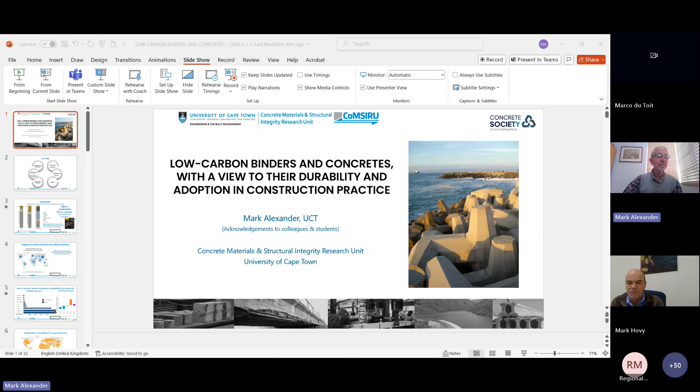All right, good. Well, welcome everybody to this CONCRETEfiX program webinar. The topic is up there: low carbon binders and concretes with a view to their durability and adoption in construction practice. Quite a big title, but anyway.

I do acknowledge my colleagues and students, most of whom really do the work, so it's good to acknowledge them - mostly members of the Concrete Materials and Structural Integrity Research Unit at UCT.

First of all, I just wanted to congratulate the Concrete Society on the Fulton Awards dinner of about a month ago. I came to that event, and I was absolutely delighted to see a crowd of close on 270 people.

And what particularly delighted me was that I knew so few of them. Why do I say that? Well, it just means that there's a whole lot of new faces, renewed interest, and that was very encouraging to see. And if you're not a member of the Concrete Society, I'd really strongly encourage you to sign up and become a member and make the society as great as it needs to be.

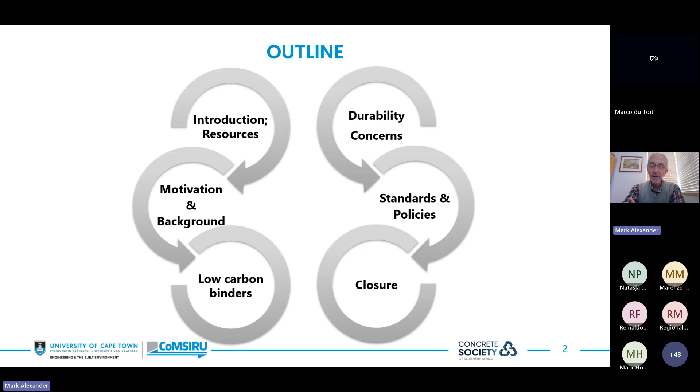So let's get started. Let me see if I can get started. There we go. Okay, so this is what I want to cover: an introduction, resources, some motivation and background, low carbon binders - what are they, what do they mean - durability concerns that may relate to these newer binders, and then some standards and policies that need to move us to the point where they can be adopted in construction practice, and then we'll bring it to an end.

I think that's an important point, that although we use this material in such huge quantities, its overall contribution, while very significant and needs to be brought down, is less than you might expect. That's contrary to what many opinions are out there in the popular press, or the uneducated press, if I may put it that way.

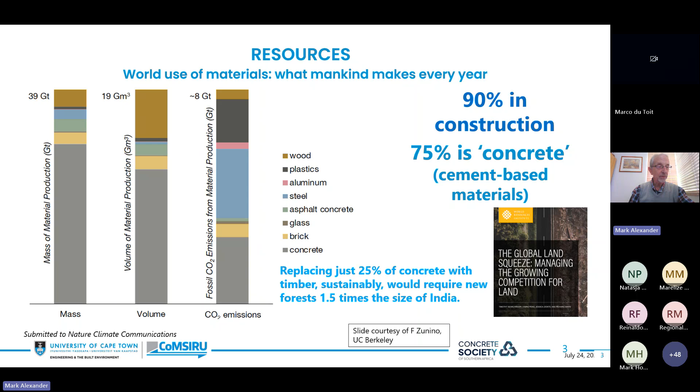If we were to replace just 25% of concrete with timber sustainably, this would require new forests about 1.5 times the size of India. So people are talking about timber as an alternative material. It has a niche, of course, but it's not going to replace concrete in the foreseeable future.

So this question of construction and building new facilities is a huge issue, a great challenge, and how we're going to do that while at the same time starting to minimize our carbon footprint. Those are the real challenges that are going to face us moving into the future. That's a very interesting slide.

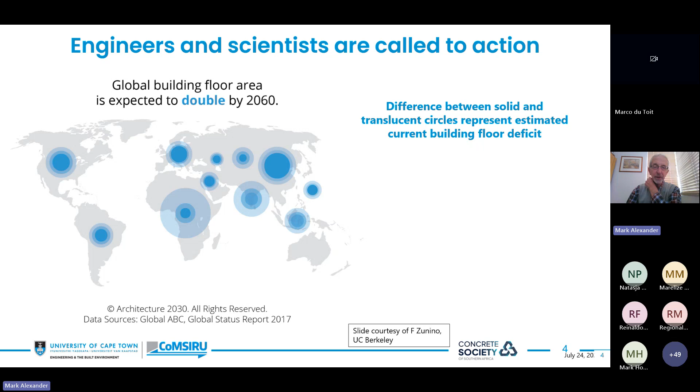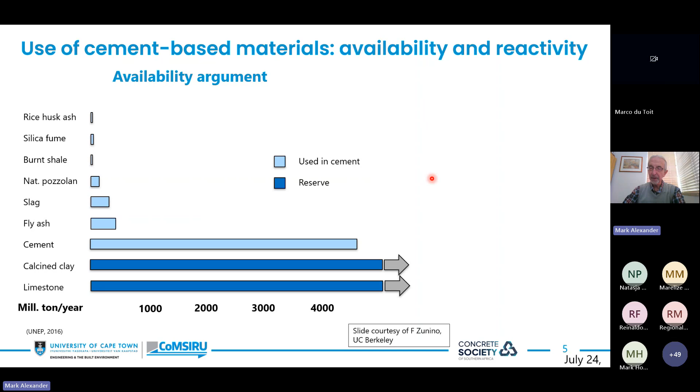But with the clays and the limestones, the calcined clays and limestones, in effect we've got, I wouldn't say unlimited, of course, but substantial resources of these materials available to us in construction. And this is where we probably need to be focusing our attention.

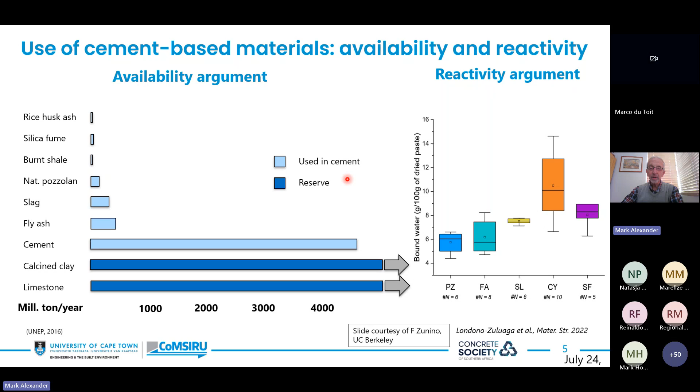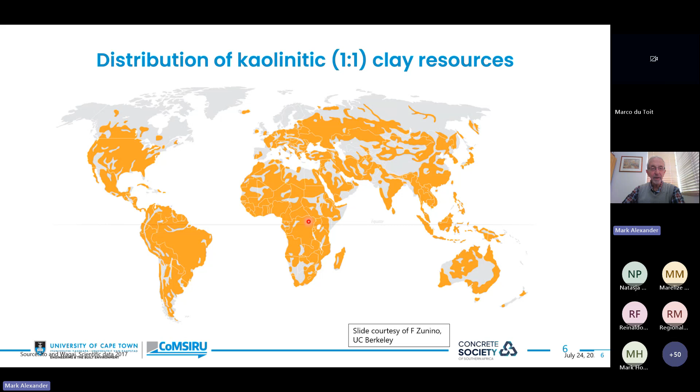More particularly with our own continent, they're well distributed in East Africa and Central Africa, less so in South Africa, but for us in the Western Cape there are good sources down here, and other parts of the country also have good sources. These represent the desert areas, the Kalahari and the dry Karoo. So we've got lots of clay. There's plenty of that all over the world, South America, to a lesser extent in India, but there are abundant clay resources pretty much everywhere we need them, particularly in Africa.

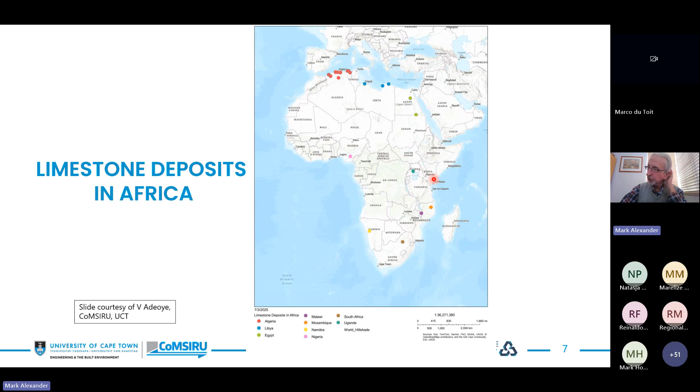Now let's get back to the topic in hand, which is this question of low carbon binders. I've got some definitions here. First of all, the durability definition is an important one. Durability is the ability of a structure or component to withstand the design environment over the design life without undue loss of serviceability or a need for major repair.

Now that's important because durability is not an intrinsic material property. You cannot talk about durability of concrete without talking about its environment and the life for which you want it to operate. So what might be durable in one environment may not be durable in another, and one must not confuse that. So durability relates to the concept of material performance. It's not a purely intrinsic property, and it relates to the dominant deterioration mechanism.

On the other hand, if we look at how low carbon binders are defined, I've made up this definition, I think it's not bad. Binders with significantly lower carbon footprint than traditional PC or Portland cement, achieved via use of supplementary cementitious materials, including calcined clay materials and other alternative binders, and possibly alkali activated materials, which may have a niche, but quite a limited one. And the caveat here is that any material we are contemplating as a low carbon binder must have a total lower carbon footprint in the finished product. It's no good doing that on a limited basis. One has to look at the whole picture before making up your mind.

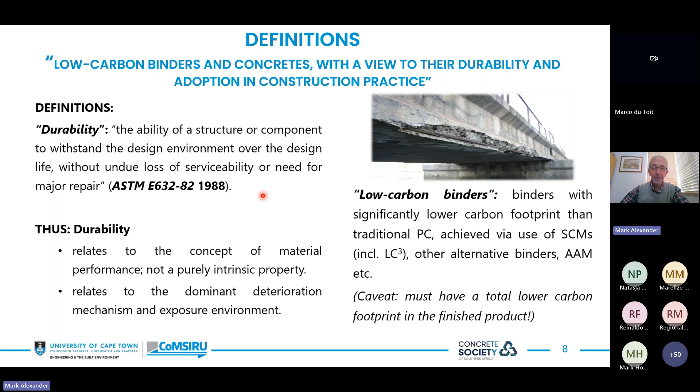That's very important. Now, we're also talking here about the low carbon economy and circular construction. Up till now we're used to this sort of loop where we get raw material extraction. It's really a linear diagram, but shown this way for the sake of space. We then go and make our construction materials, construct infrastructure, buildings, and so on. We use them, then deconstruct or demolish, which goes into construction and demolition waste, and normally to landfill.

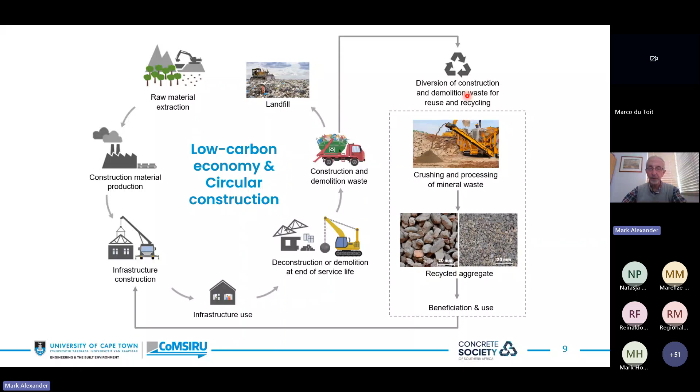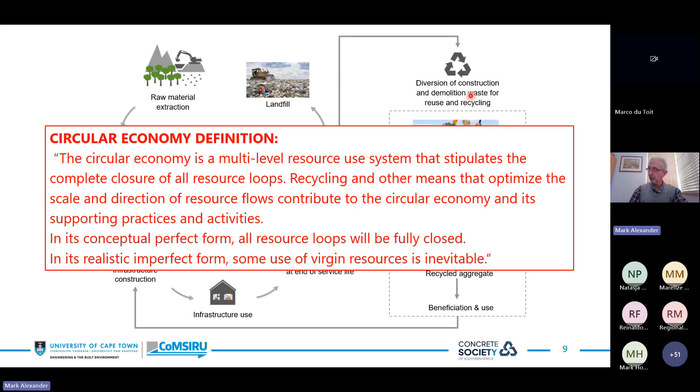However, we have to move into this loop here, the complete loop, where we bring materials back in and begin to reuse them either as new aggregates or possibly sources for cement or some other use where they're not simply disposed of. That brings us to the idea of the circular economy, a multi-level resource use system that stipulates a complete closure of all resource loops. Recycling and other means that optimize the scale and direction of resource flows contribute to that circular economy and its supporting practices and activities. In its conceptual perfect form, all resource loops will be fully closed. In its realistic imperfect form, some use of virgin resources is inevitable. That's where we're trying to move at the moment.

Now, to step back a little bit, low carbon binders are actually not new. We've been using slag cements in South Africa for certainly more than half a century, from the 1950s, when a lot of work was done at the NBRI of the old CSIR, and by Mills at Wits University, and others.

If you look at this diagram here on the right from Fulton's Concrete Technology, 1969 edition, I think it was the fourth edition, you can see that we have Portland blast furnace cement there, and that would have been roughly a 50-50 cement with clinker and blast furnace. So we've been using this stuff for quite a long time, and in many cases at highly extended values, for example, some of our dams, and we've got to understand its properties pretty well. And it's in many cases shown admirable durability. Of course, in some cases not, but mostly it has.

So what I'm saying here is that concrete is in reality a low carbon material. I'm going back a little bit here. These are the numbers that maybe should have come up earlier. So let's move on from there.

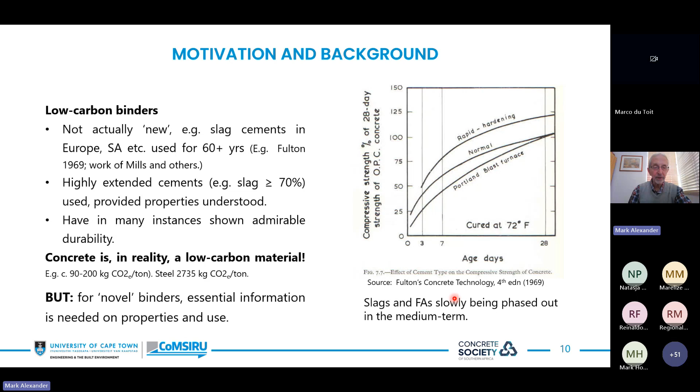But for the novel binders, these newer materials with which we're now starting to work and try and understand, essential information is needed on their properties and use. Another point, and this is more of a worldwide phenomenon, is that the slags and fly ashes are slowly being phased out in the medium term. In South Africa, we have a large supply of fly ash in our ash dams, and I think that's a source of SCM that can be well utilized into the foreseeable future. But we're going to have to learn how to beneficiate that material. And in some cases, we don't have that, because in the Cape, we have no fly ash whatsoever produced in the thermal stations. So here are some key questions that might prompt our thinking.

First one is, what are the essential challenges in getting new information and applications of low carbon cements or concretes into practice? What are those challenges? Secondly, what actions do we need to take in those areas? And thirdly, what will be the effect of climate change? Higher temperatures, lower relative humidities, greater rates of deterioration. How can we understand these looking into the future? These are some very key questions.

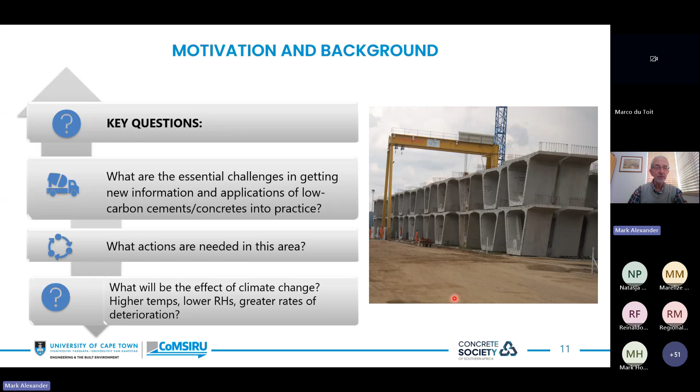And some of the suggested pathways that I would like to propose here are as follows. First of all, the importance of fundamental research. If we don't understand the materials we're working with, we can't use them effectively. Fundamental research has to be done to understand them properly.

Then we also need to carry out work on concrete, not just pastes and mortars. This conference I attended, I mentioned a few weeks ago, we spent 4 days talking about cements, very fancy ones, 1 day talking about concrete. It should have been the other way around. 4 days on concrete, 1 day on cement, because it's concrete that's the real engineering material. Cement is not an engineering material. It's used to make an engineering material. And so we've got to carry out work on concrete.

And importantly, we must have field applications, demonstration projects that prove the viability of the systems, because engineers need real sort of data to back up what they have to use. We also need policies and standards, materials and construction specifications, appropriate standard test methods. These are great challenges moving forward, and we continue to need academic and industrial collaborations to move this whole thing forward.

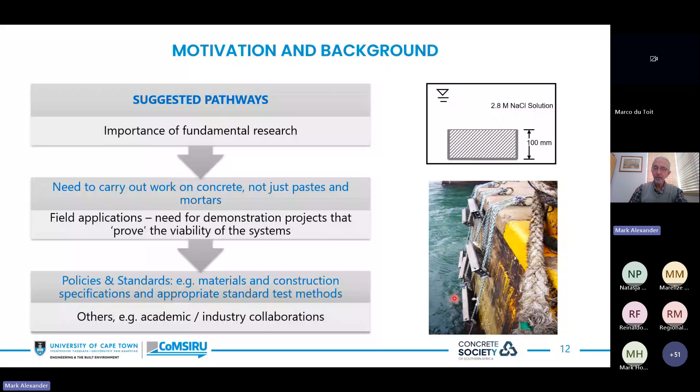Now, what durability issues might be expected with low carbon binders and concretes? Well, first of all, many people will say rapid carbonation. Well, yes, but I want to make the point that I don't think that that is per se a durability problem, and I'll come back to that.

Then there are microstructural changes with time, for example, from the ingress of aggressive agents, the effect of environment, changes of phase assemblages within the paste, and so on. Then there are issues where residual alkalinity is essential, for example, in carbonation and soft water attack, where we need a certain amount of alkalinity there. Early strength issues remain a major challenge in any of these systems, or many of them.

And also the fact that in many cases they're not yet robust enough to be used in construction. One of the great successes of Portland cement concrete is its robustness. We abuse it, we use it in all kinds of ways, we sometimes get it all wrong, and somehow it always seems to come back and do the job for us. And that's because it's a robust system, and that's what we need in construction, is robustness.

Durability also requires both chemical and physical durability. So we need to understand chemistry and physics, particularly in relation to transport properties. On the physical side, we need impenetrability or tightness of the microstructure.

Microstructure can change with aging and things like carbonation. On the chemical side, we need adequate hydration products and interactions with those products with various aggressive agents, the buffering aspects for carbon dioxide and chlorides, the alkalinity issues, the lower Portlandite or calcium hydroxide residuals, soft water attack, and sulfates, and so on. There's always a competition between these two aspects which has to be understood.

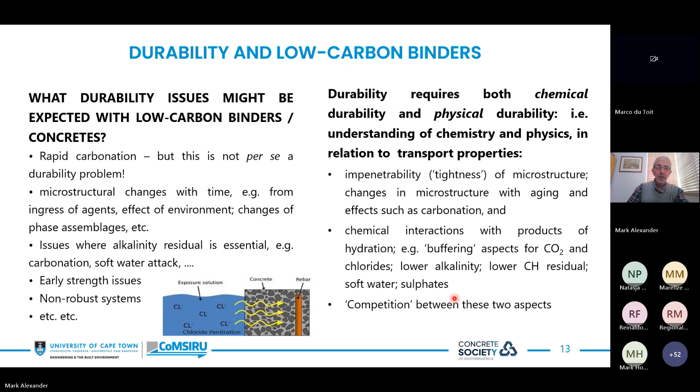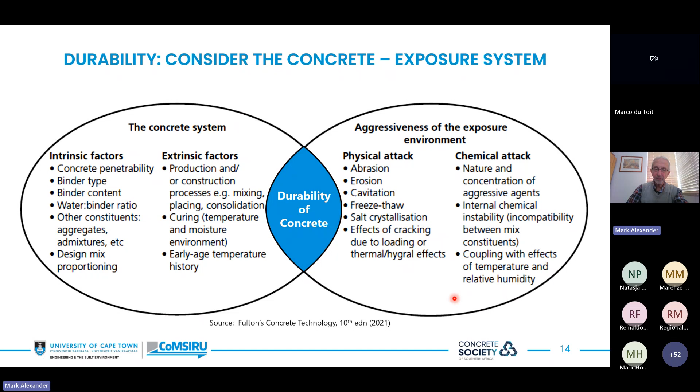We have intrinsic factors on the concrete side, things we sort of know and understand: binder type, binder content, water-binder ratio, and so on and so forth. Extrinsic factors would be largely the process and production parameters. On the exposure side, physical and chemical attack. We need to understand the kinds of deterioration mechanisms at play, and how we handle that in terms of adequate durability. So concrete durability fits into that central slice where it comes together between the concrete system and the exposure system, and we have to bring both of those to bear on the problem.

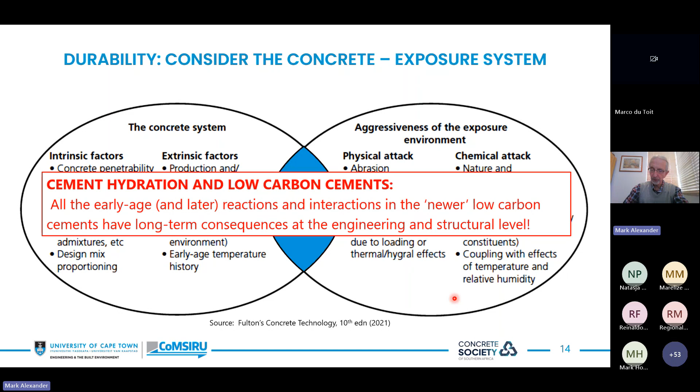Also, with many of these newer cements that are starting to be looked at, the point that needs to be made is that anything new has no history of performance. That's a big issue, performance history. The problem is that the early age and some of the later reactions in these newer low-carbon cements have long-term consequences at the engineering and structural level. Very often we lack that data and have to project into the future on the basis of quite limited short-term data. This is also a challenge.

So we're not concerned about the bulk concrete, we're concerned about the cover concrete. Just like the skin analogy, the skin of our bodies is what protects us and gives us longevity of life. It's that cover, the skin of concrete, that gives it the life that we want. And that's where we have to understand what's going on. Hence the whole durability index approach was based on that philosophy.

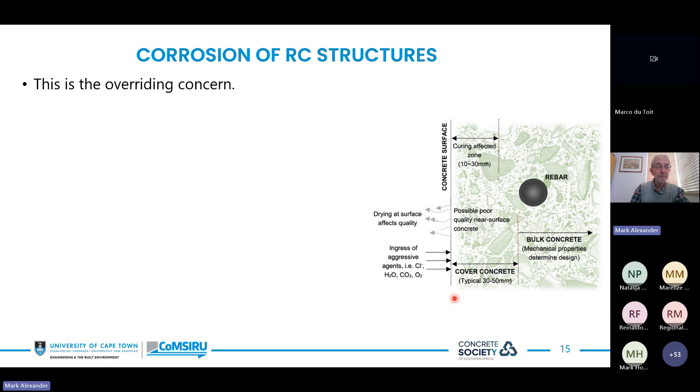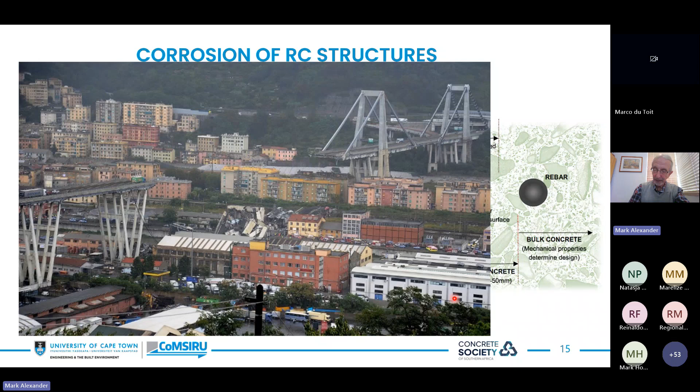And if we think about corrosion, we don't want this kind of thing to happen: the Morandi Bridge in Genoa in 2018, which collapsed. That was a very interesting structure, pushing the boundaries at the time it was built in the 1960s, a bold design. What happened there was we just didn't have enough redundancy in the system, so that when corrosion finally took that structure down, there weren't alternative load paths for the structure to remain standing. That's a structural engineer's nightmare, and we don't want that to happen, of course.

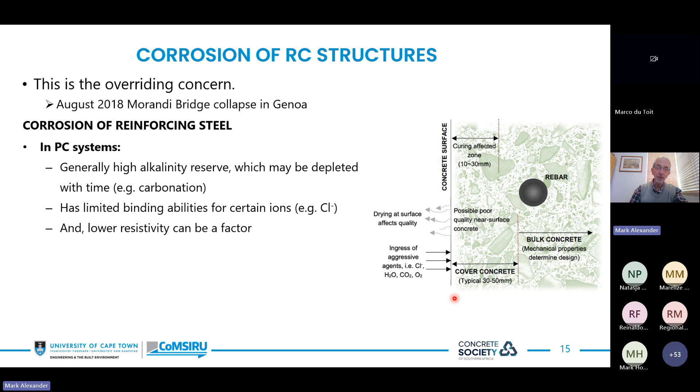In plain Portland cement systems, with regard to corrosion, generally this is again why plain Portland cement systems have done so well: we've got this high alkalinity reserve, which admittedly can be depleted. On the other hand, it has limited binding abilities, particularly for chlorides, and it has low resistivity, but in general it does quite well.

In low carbon systems, now we're talking about systems with clinker contents of, let's say, 60% and lower, so quite extended cementitious systems, they may be less robust. This question of robustness comes up again, more sensitive to processing techniques, temperature, and so on. On the other hand, they may offer better resistance to aggressive ions, and generally they have a lower alkalinity, which can be an advantage in the case of AAR, for example, but sometimes also a disadvantage.

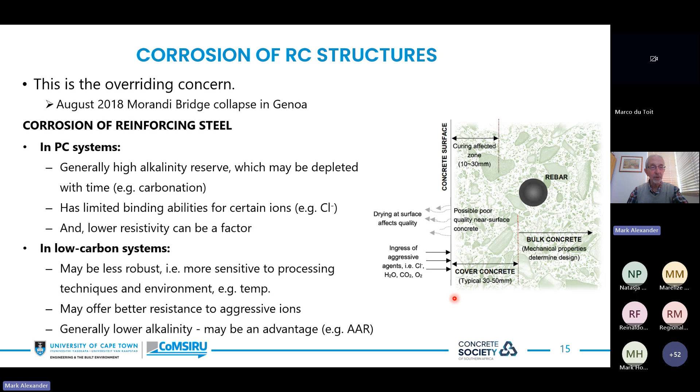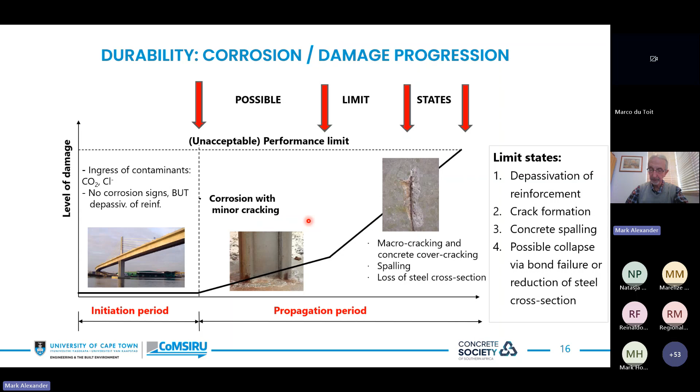And what sort of limit states are we concerned about? Mostly at the present time with durability and particularly reinforcement corrosion, we're looking at an initiation limit state. This is where we're designing to. But we need to be thinking about, can we design to these other limit states? This is obviously a bit too far, but can we work in the propagation period? Because many of our structures are sitting in this region now. Can we continue to extend their lives? These are the big questions.

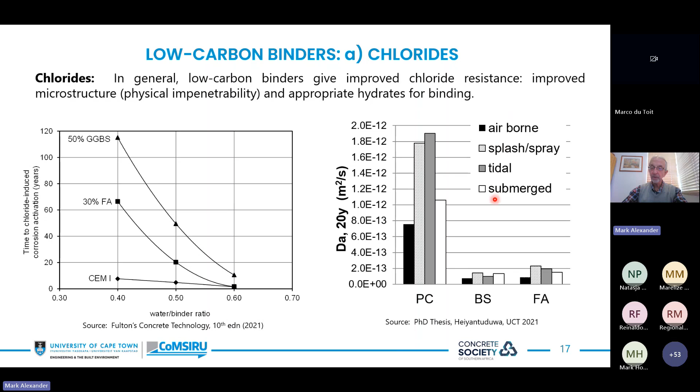The microstructure is improved actually to such an extent that we get this huge improvement and hence a much, much longer life. And that's true for all the different marine zones within which we might be concerned. However, that's not the whole picture, because it's very, when you come to do site work and you start to try and take actual site measurements of chloride profiles. Chloride profiles from the lab are beautifully ordered, nice sort of Fickian curves, but on site, the story is very different. And here's work from my colleague Hans Beushausen, where he looked at a whole lot of things around the coast, Port Nolloth, Walvis Bay, Cape Town, different zones, different years.

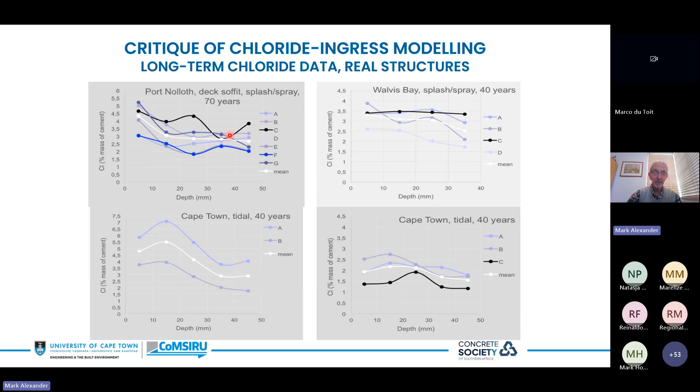And what you see is chloride profiles that seem to be sort of going all over the place. And so the traditional chloride profile is not quite so easy to find in real structures. And these are samples taken from very close to each other. So they're not from vastly disparate structures. They're from relatively closely spaced or closely sampled sites within these structures in hand. So the variability is huge. And that's something we have to, again, grapple with. So there's the lack of correspondence between the real site data and the lab data. Easy to work in the lab, much more difficult on site. Very high variability, even when different samples are tested from the same or neighboring elements. And based on that scatter, can we really do reliable chloride prediction?

It's impossible, very difficult, that's the question. What are the limitations of chloride ingress modeling? I'm not saying we shouldn't be doing it, but we need to treat it with respect, and we need to have a little bit of humility when we look at the models we use for chloride ingress.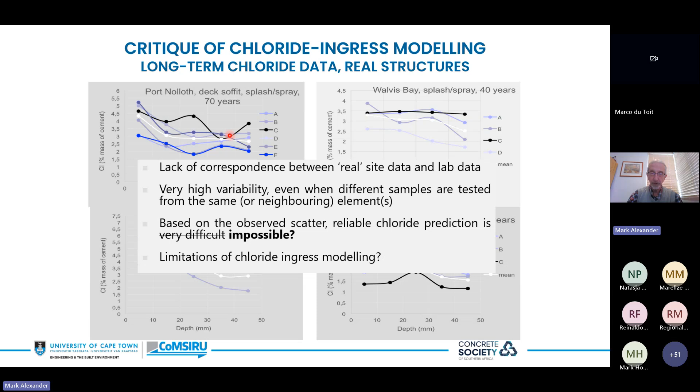However, in low carbon systems, before carbonation, these are pretty good materials—lower critical and threshold pore diameters, a refined pore structure, and so on. But after carbonation, the jury is still out on the question of coarsened pore structure, higher connectivity, and reduced interaction of transport media with pore surfaces. What are these effects? Let's have a look.

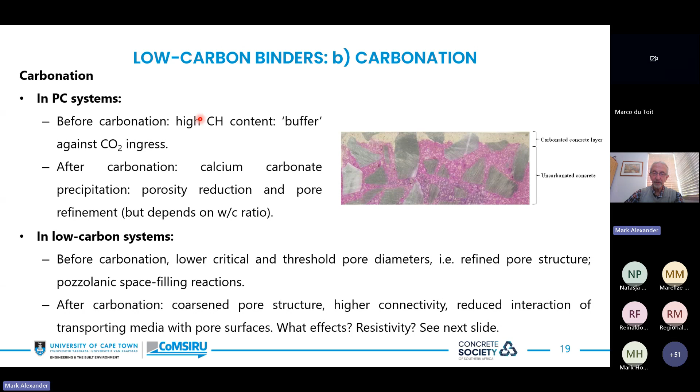Here's some very interesting work from IIT Delhi under Shashank Bishnoi, where they took fully carbonated mortars at 3% CO2, accelerated carbonation testing. Here are the parameters and environment of the test. Bear in mind these are fully carbonated, and we're looking at resistivity in kiloohm centimeters. On the left, non-carbonated; on the right, carbonated. Look at the scales: resistivity here up to 150 kiloohm centimeters, on the right only 25.

You can see the Portland cements or plain cements are down at the bottom, less than 20, often only 10 kiloohm centimeters. Hence they're not very resistive, and therefore corrosion can occur. The other materials—this in particular is a slag, PS there, an Indian material, really superb—and even the calcined clays are doing really well. Carbonate those materials in mortars, at least under accelerated conditions, and the whole picture turns around: now the Portlands are doing much better, they've improved, but the other materials have not.

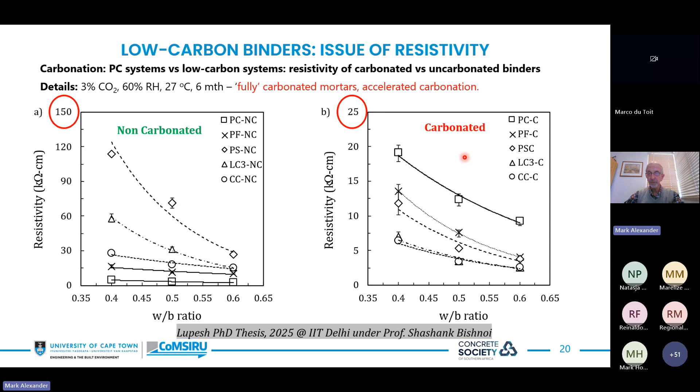So the resistivity has come down, and you might say, does that threaten long-term durability? Well, maybe or maybe not. Here's some very different data from our own work, which Kilumile is doing at the moment in Dar es Salaam under our supervision at UCT. He's looking at PC and low carbon systems and resistivity of carbonated and uncarbonated binders.

He's looking at limestone calcined clay cements. This is the clay he's using, and different grades of limestone down to 59%—this would be a non-cement grade limestone, this would be a cement grade limestone. We're looking at these lower grade limestones, unsheltered versus sheltered.

As far as resistivity is concerned, Menard Kilumile finds that at least at 6 months—who knows what happens, we'll see in 12 months shortly—his concretes in the unsheltered condition are improving in resistivity, back at 150 kiloohm centimeters, which is really excellent. In the sheltered condition, it's going somewhat the other direction, but this isn't a problem because corrosion isn't an issue there since it's sheltered. In the unsheltered, where corrosion is an issue, it looks like resistivity may be improving. We need long-term data, and this is the importance of real site work on actual concretes, not relying purely on lab-based approaches.

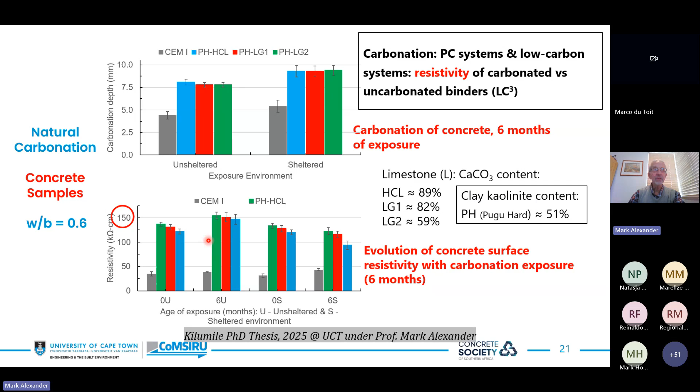So this is really interesting data, and it seems to contradict to a large extent some of the accelerated data coming out. This is also work done on kaolinitic clays from Tanzania—there are some superb clays up there. You can see here, this is Portland cement and slag concretes, way down here, less than 200 kiloohm centimeters. But even at 100, these materials are still superb.

A previous student of mine, Emmanuel Leo, was measuring these kinds of values. I actually asked him, do you really believe those values? And I don't know if I do believe them. They were measured in our own lab with our own equipment, and I'm still not sure that I believe them.

But whether they're true or not, the fact is that these clays have got incredibly high resistivities, which means that corrosion may not be a problem in the future.

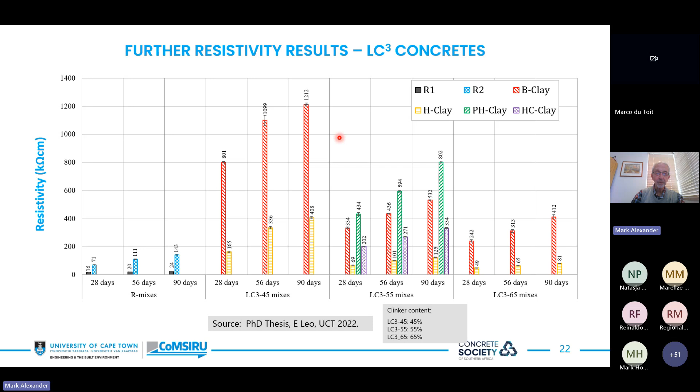Here's another very interesting set of data: carbonation data. This dates back quite a while to some work done in 2006 on essentially SANRAL structures, bridges, that we got some data from. Here we've got the depth of carbonation versus age for Cape Peninsula, for a range of concretes, all of them pretty well plain Portland cement concrete. You can see that very few data exceed about 30 millimeters of carbonation, with a couple of outliers, but overall it's clustering down here.

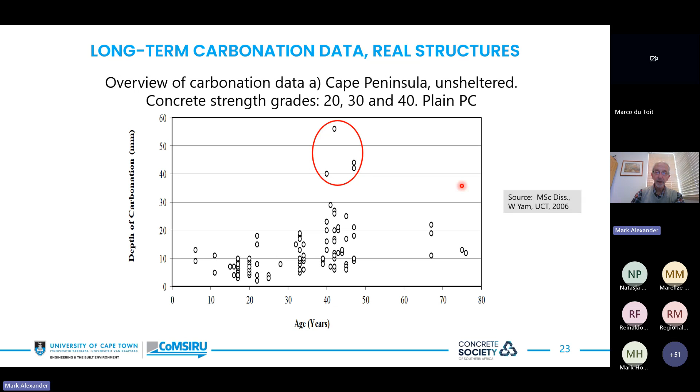First of all, the typical carbonation rate curve is not very clear there at all, and secondly, the carbonation depths are not terribly high. So is that a factor that we need to take into account? Admittedly, this is for plain Portland cement.

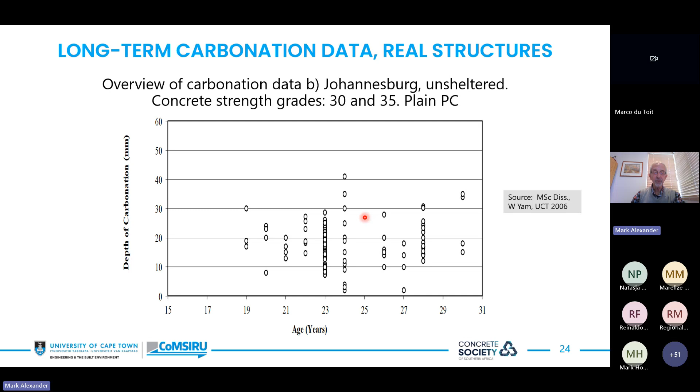If you look at the Johannesburg area, again unsheltered, we've got 30 and 35 grade concretes here, a lesser time frame. But even here, carbonation is hardly exceeding 30 millimeters within the time. In the case of the Cape, we've got 80 years of data, and in the case of Johannesburg, 30 years, mainly from the Johannesburg motorways. So maybe carbonation is not the huge issue we thought it might be. It may well be so, of course, in the low carbon binders, but then we've already had caveats in regard to that matter.

RILEM, in a very recent RILEM letter in June 2025, had RILEM TC281, which is around carbonation, had this to say: in the review that is in this report, it is reported that there are many cases from engineering practice where carbonation of the cementitious matrix surrounding the steel does not lead to noticeable corrosion or to corrosion-related damage at the level of the structure. Go and read that report if you want to see more.

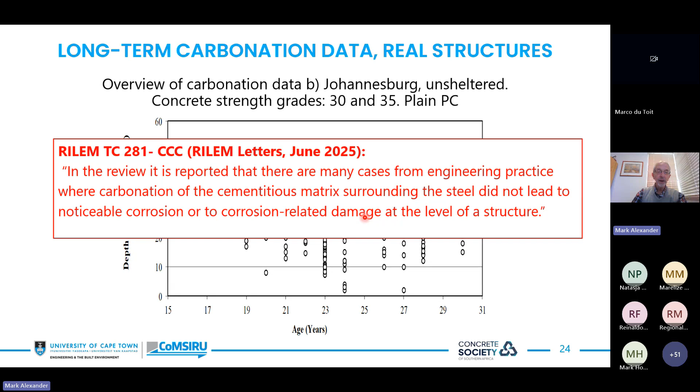Right, we need to bring this thing into land as soon as possible now. Let's talk briefly about standards and policy, because we need to get these newer materials into the construction space, and that is easier said than done. Bear in mind that engineers work to codes of practice and specifications, they don't work to research data. So we have to turn the research data into usable codes of practice, and that's not something that researchers like to do.

And may I mention this huge issue: if appropriate standards are absent, including new specifications and codes of practice, uptake will be limited and sketchy. We stand in serious danger right now in the country as a whole, that our standards are not being updated because the old CCSA has now closed down, and that was a body tasked with having to update standards. Bryan Perrie has done fantastic work there over the years, and that is simply hanging in the air now.

So if the industry doesn't take it seriously to make sure that our standards are updated, and this is largely an industry issue, not an academic issue, the industry has to push the updating of appropriate standards, otherwise our industry will ultimately grind to a halt. That's an extremely important point, if I may make it.

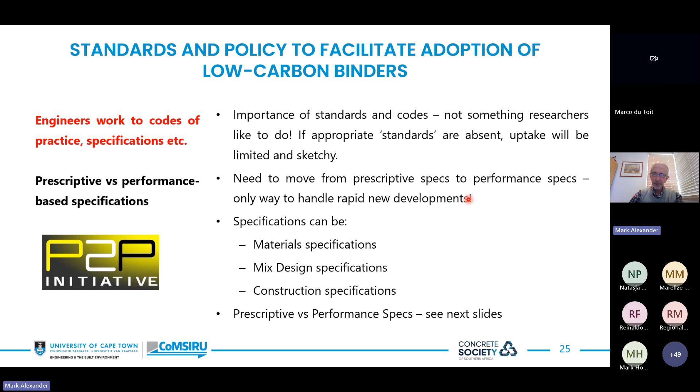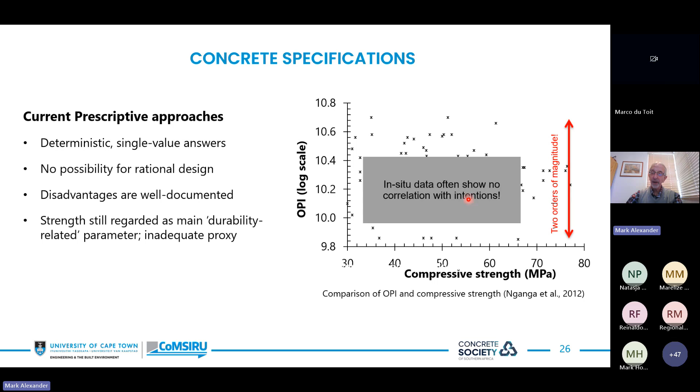We need also to move from prescriptive to performance-based specifications, because prescriptive specs that we currently largely have simply cannot handle the complexity of the new developments into which we are moving. The prescriptive approaches have their limitations, which I've mentioned on the left-hand side of that slide: there's no possibility for rational design, we cannot incorporate new materials because they're not covered, and also the site data often doesn't show correlation with intentions, pretty well like we saw earlier.

Here we have research running well ahead of practical implementation. We've got lots of research data coming out, but very little practical implementation, largely because of this gap in our standards and our codes. The move to performance-based specifications is gathering momentum, and I'll talk a bit more about that just now.

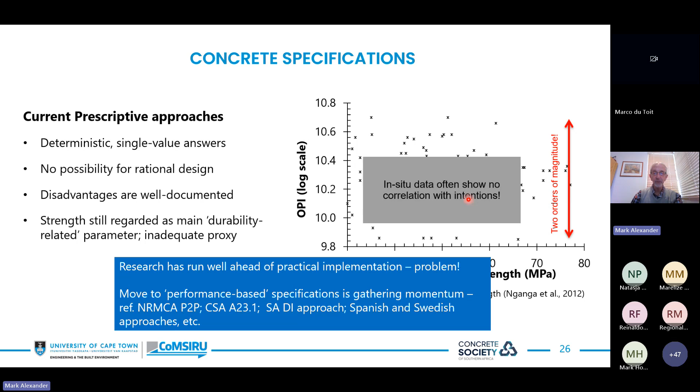The performance-based approach is given here: you have to quantify your environmental loads and the deterioration mechanisms, you must have performance criteria, prediction models, means of considering variability, and appropriate specifications and QA systems. The picture is a whole picture here: we've got the owner, the design consultant, the material specifications, the concrete producer, the material properties, the contractor, all of which should lead, if it's done properly, to durable concrete structures.

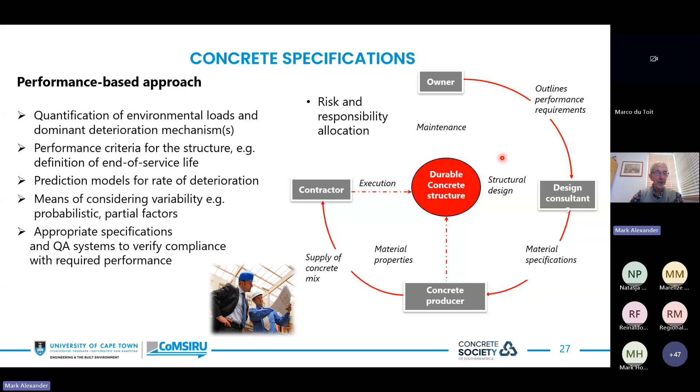So it's a whole picture sort of approach. In addition to codes of practice, we also need some policies, for example, around producing materials with low carbon footprints, or even setting standards on those carbon footprints at national, regional, and international levels.

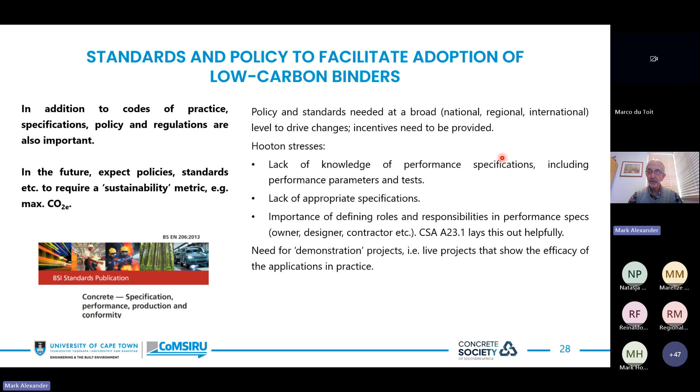Doug Hooton from the University of Toronto stresses the problem here is the lack of knowledge of performance specifications, including the parameters and tests we need, lack of appropriate specifications themselves, the importance of defining the roles of the different actors within the construction space, and the need for demonstration projects. Now, where are we in regard to that continuum?

Well, at present, the current EN 206, which is SANS 50206, does not include explicit performance parameters or tests, so that doesn't really help. The FIB Model Code 2020, which has now been adopted, toys with these aspects, but doesn't really grapple with them to the point where we can use some of these things effectively.

Performance-based specifications do, however, exist. The CSA, the Canadian Standards Association, particularly with regard to chlorides, is a very eminently suitable specification for them, at least. We have our own COTO spec, which picks up a lot of these issues.

There's a French program picking up on some of these issues. We've got some interesting work coming out of China, and the Swiss one based on the Torrent meter, which is also in place. We now fortunately have a Portland calcined clay limestone cement standard that has just been produced in India, 2023.

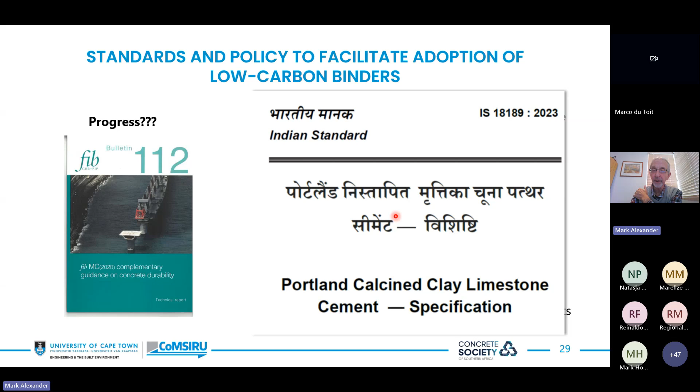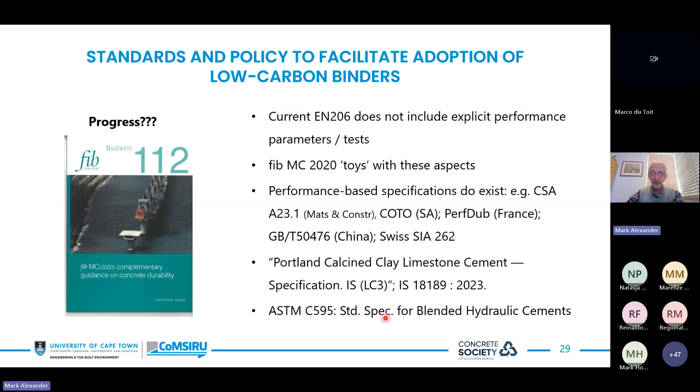That's really helpful. If you get hold of that, you will see how they're working with this material. So we actually have a standard in place for this particular material if we need it. We could base ours on that if we wanted to. And in ASTM, North Americans are moving ahead with this kind of ASTM C595.

Right, so let me bring this to a conclusion. I've been long enough already. Low carbon cements and concretes have been used successfully. They're not really new, but some of the newer binders are going to need a lot of work to really understand them and verify them in practice, to the point where we can be reasonably confident in their long-term performance.

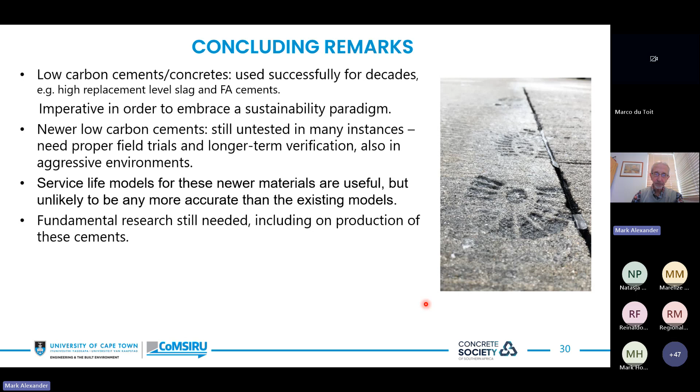We need that indeed. Service life models for these newer materials are useful, but they're unlikely to be any more accurate than the existing models, which, as we saw, do have limitations. We still need fundamental research, including the production of these cements, but at the same time we need real field data.

We need a comprehensive suite of performance specifications, ditto re policies and regulations. And in many cases, durability issues such as carbonation may be able to be mitigated by suitable structural design and mix selection. So I think we've got a very exciting field ahead of us. Lots of work can be done, and I'm sure that the space will change rapidly in the years to come.

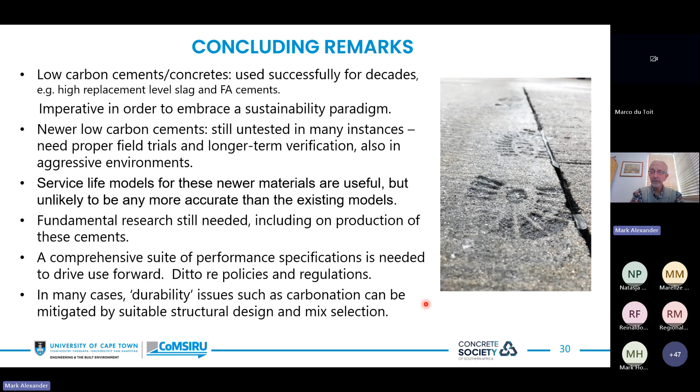To close, let me bring you two quotes. The first is from Karen Scrivener at EPFL in Lausanne. This is what Karen has to say: making cement is simple. Well, some of our cement people may want to contest that remark, but nevertheless, making cement is simple. Making cement simple is very difficult. In other words, these new cements need a lot of understanding, and making them simple is not that easy.

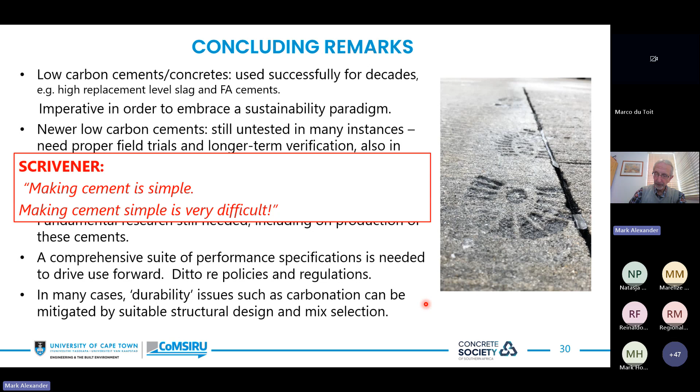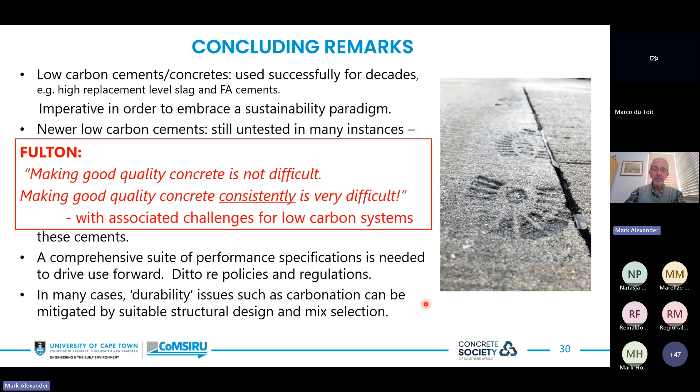I want to finish off with a quote from Sandy Fulton: making good quality concrete is not difficult, but making good quality concrete consistently is very difficult, with associated challenges for low carbon systems. I hope that might stimulate your thinking. So with that, let me bring this to a close and thank you for your attention. And I'm sure if there's some questions, we'll do our best to answer them. Thank you.

Thank you, Mark. It's nice to see a global perspective on these things. Sit back and look at the big global perspective, and the use of steel and timber and all that. It does put it into perspective.

I'm not sure if I must look at the comments page, if there's any.

Are there any questions at this stage? I'm trying to look for that as well, Mark. Yeah, for some reason I don't see it coming up there. Okay. Natasja, am I missing something here? I don't see any questions either.

I had a question because many years ago there was high alumina cement which looked like it had potential and started being used. Then there was what I think was called conversion, where they said here are some long-term problems with high alumina cement - we cannot use it in structures because of the conversion. Now if you start introducing calcined clays to such large percentages, 60% of your mix, I'm sure that's been sorted out, but maybe there's a little background information there.

I don't know if my slides are still showing, but anyway. Yeah, we can see you. We can still see your slideshow there, Mark. Okay, because when you're finished, I want to come. Maybe I can just put the slide up quickly.